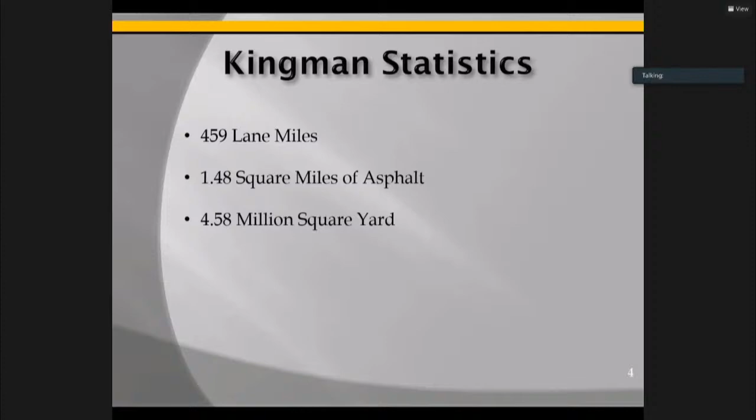So this is just a tool that helps us budget and look at the treatments we're going to do. Now that always comes down to the project level, because the program is going to say, based on these conditions and the severity I'm seeing, here's what the treatment recommendation would be. We as pavement managers are going to go out in the field, boots on ground, and look at it and say yes, we agree, or no, we don't. Maybe we can go from a heavy surface seal to back that out to just a fog seal or some type of seal coat on the top.

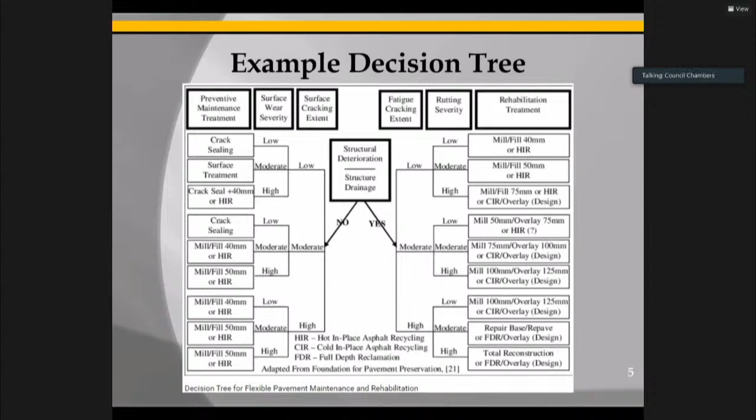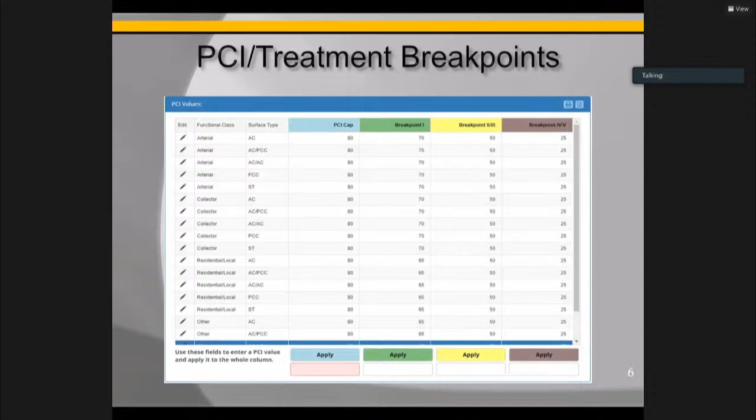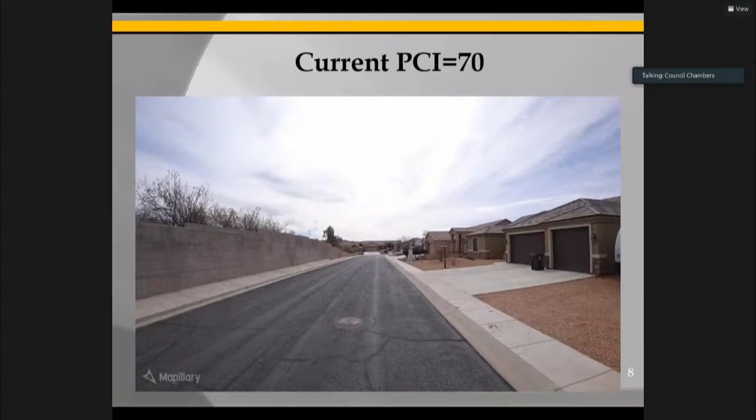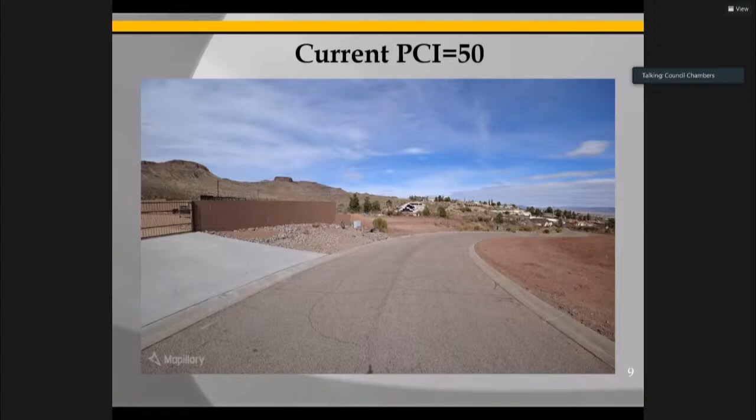Maybe this is a scrub seal, or we do a 2-component treatment. Some of the counties had luck with a SAMI, which is a membrane that helps absorb some of the stress, or a double chip, or something like that. But again, the good thing here is you don't see the base failure. As time goes on, with so many cracks, you're going to start to see water intrusion into that base material, and you'll actually start to see base failures as well. You guys have driven around town and seen them, you got a divot in the road, or maybe the wheel path is rutted, stuff like that.

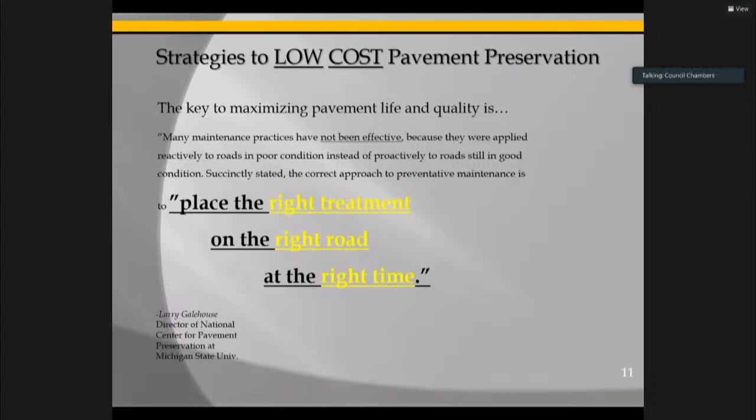Next slide please. In short, both of those tools, the breakpoints and also the decision tree, are used to help us choose the best treatment for the right road at the right time. That's both for cost and for life cycle, which ultimately comes back to cost. But we want to try and minimize, if we can, staying out of a neighborhood from being there every other year, every year, and try to extend that out and be there every couple years. One, we get a better life cycle cost, and two, we're not such an impact to the residents. So right treatment, right road, right time. That's going to be the theme as we're going through this.

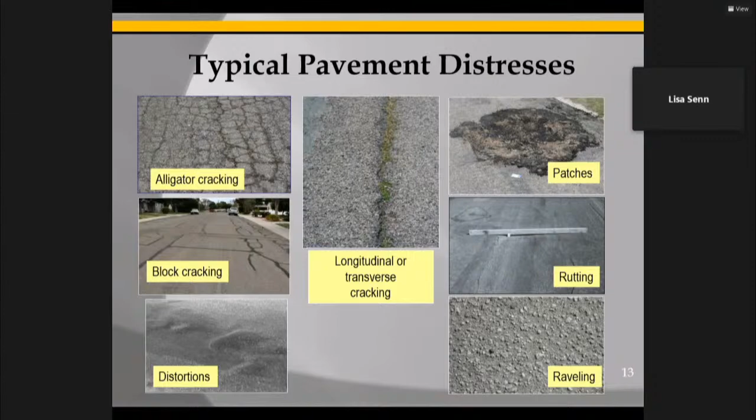Some of the distresses that Jack was talking about, I wanted you to see them up close and personal. So this slide has the alligator cracking on it. It has block cracking, distortions, which if you ride down the road in your car, you feel bumps. You don't want them to be too large or that cup of coffee might end up in your lap. There's longitudinal cracking or transverse cracking. There are patches, and the patches in your city are much better than this one. There's also rutting, caused by excessive loads on that wheel path that break down. There's also raveling, weathering and raveling, and this is an environmental distress. You'll hear a lot of talk about what is an environmental distress and what is a load-related distress. Environmental distresses do degrade the road, but not as quickly and not as harshly as load-related distresses. Next, please.

This shows somebody out walking. We do our QC with walking inspections. You're using the Street Saver software, a very popular program based on the MicroPAVER software of about 30 years ago, but it's moved forward so much. We look at the ASTM protocol as the basis for everything we assess in the street. If you're doing walking inspections like this man is doing, we look at 10% of the sampling area of a street section. So if your street is 1,000 feet long, we're going to look at 100 feet of it, curb to curb.

For the city of Kingman, we used what's called semi-automated distress collection, with a van. You may have seen the little van running around the city with cameras and all kinds of accoutrements, like a Google Earth or Google Maps vehicle. We use these hand in hand. The automated method, because you're driving faster, may not catch some low severity distresses. So we set up control sections to calibrate not just the inspectors, but also the van, to look for the smaller, lighter distresses, so we catch them all and give you a good look at the actual condition of your streets.

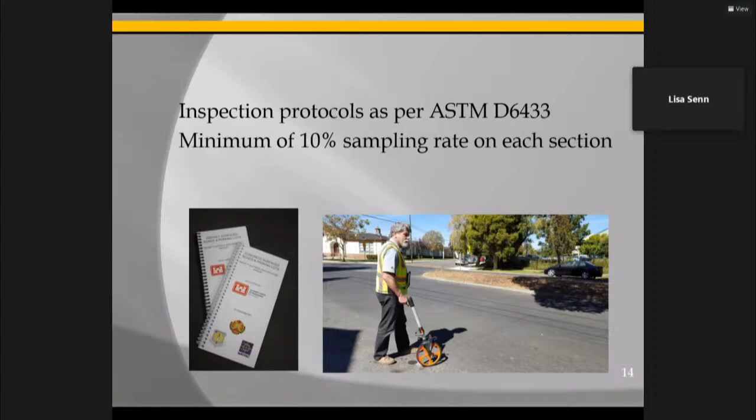Some of the things we did: we gathered the M&R records, the maintenance and rehabilitation work that staff has done, with help from Jack and his staff. We entered them into the Street Saver software. We're going to do analysis to find out what these treatments did to improve the roads.

We're also going to be looking at upcoming projects. We'll plug those in so that when the city has, say, $2 million to spend on their roads, they'll get the road segments that the software is suggesting. And if there are any projects already being designed, we'll include those as well.

As Jack mentioned, it's all based on the decision tree and the unit costs. We just had our decision tree meeting last week where we talked about the unit cost of different treatments you use, what other potential treatments may be used, whether they're effective, and the biggest one - can you even get that treatment in the city of Kingman?

As much as I love Kingman, I've traveled through it many times going from New Mexico to California. There are things you can't get there. So some of the treatments that would be really good may not be available within your area. That's okay, because there's a plethora of treatments out there.

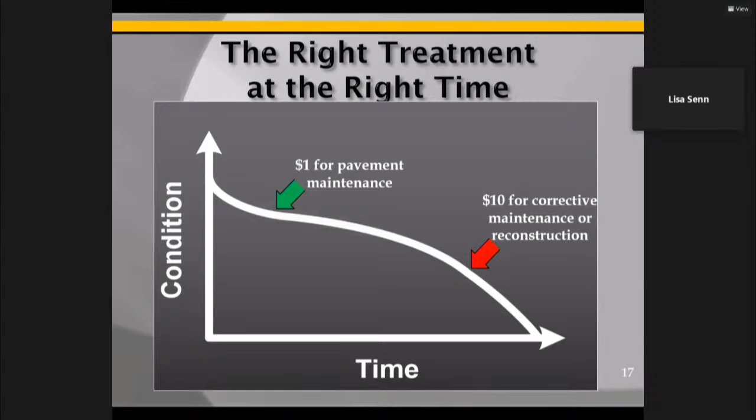So if we do preventive maintenance, it could be as little as $1, or if it gets down the curve, it could be as much as $10 a square foot. So it's always better if we can catch them on the upside of it, because it's going to be cheaper and we'll get more work done. Next, please.

So in the preventive or proactive, we want to preserve the surface of the asphalt. We want it to stay in good condition as long as it can be. So we're going to address the light distresses, which would be a little weathering, some minor cracking, longitudinal and transverse cracking. We're going to put this treatment down that's going to retard some of that cracking and slow it down. And we want to reduce the time that we're going to have to get over to the heavier maintenance, the rehabilitation. We want to stay in the preventive maintenance as long as possible.

There are corrective and reactive strategies, which is to restore the poor pavement to good condition. We restore streets that have had, for instance, in the city, if you have shopping centers where you have loaded goods coming into the city to drop them off for residents to purchase, that truck is loaded and the weight of that truck is going to bear down on the street sections. When they leave, they're a lot lighter, and so they don't have as much impact leaving the city. But those are the things we look at.

Is it a street that is going to have some heavy loading for trucks? Your residentials always have trash trucks out there. Those can degrade the streets. We want to make sure that, as Jack was talking, that we cover up these cracks that start to develop. And so there's a treatment called crack seal that can be put down, which helps to retard the cracks, helps to keep the water and all of the other materials out. And the longer we keep that out, the longer that street is going to last. Next, please.

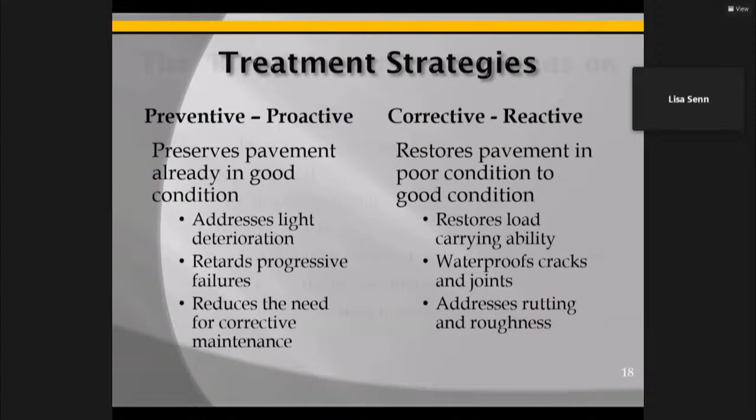So as Jack talked about, the right treatment depends on, is the pavement going to handle that treatment? Is it in the condition that that treatment will improve it? Is the environment a part of it? Do we have a lot of climate? You get a lot of sun during the summer and you get a lot of heat. So that dries out that moisture that's in pavements. We're also talking about traffic. Your arterials get a lot of traffic.

Life cycle costs: initially the maintenance cost is low, but as the street gets older, it starts to cost more. Then the last one, as I mentioned, is the treatments that we're talking about, locally accessible. And can you get it at a good price? Next.

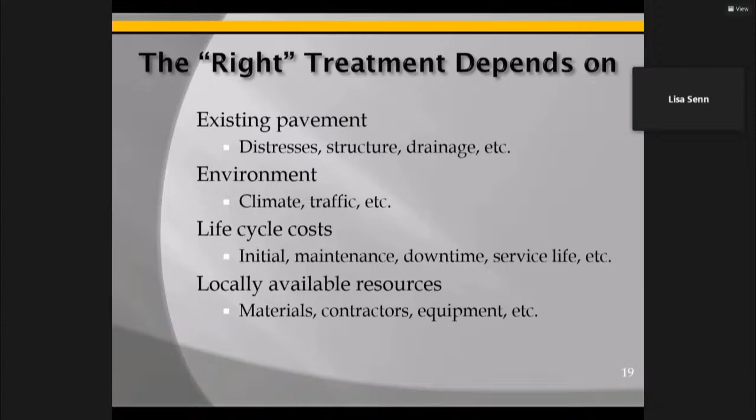So these are some of the treatments that we'll kind of run through, give you an idea. There's crack seal, which I'm sure you've seen. There is a fog seal, which has been used in the city. It's a very light application. There's a slurry seal, scrub seal, all the way up to an ultra-thin bonded wearing course, which we'll talk about. Next, please.

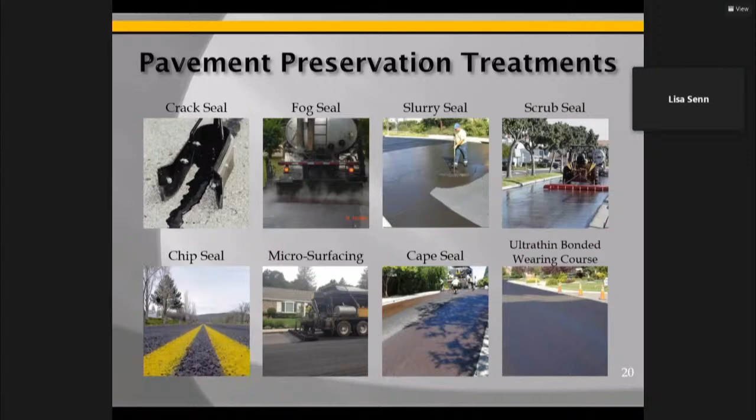So pavement preservation materials, what is it going to be? Well, we're talking about asphalt binder. Is it conventional? Does it have polymers in it that modify it? And have they added crumb rubber to it to give it a little bit more life? There's the granular side of things, which is the aggregate. We're not talking big rocks, we're talking small rocks. We're talking sand that may be there, so very fine, and reclaimed asphalt, or RAP.

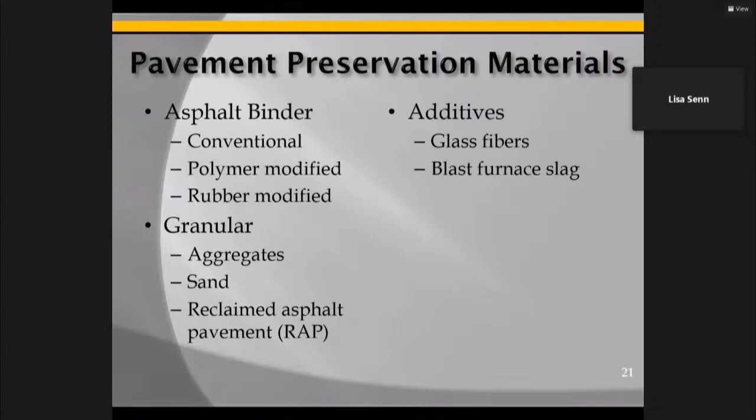There's additives that can be put in this to help extend the life of that treatment, which is glass fibers and blast furnace slag. And I'm sure a number of these things you've never heard of, but don't worry, you can always ask Jack about them, or you can ask me, or Jack will help you to understand what they are. Next, please.

So crack seal, by definition, is flexible. It's rubberized asphalt material that's placed in that crack. And as you see in this picture, this is not the way you do crack seal. And I remember taking this picture in the county of Santa Barbara here in California, and I couldn't believe that somebody actually crack sealed the road so that it looked like this. It's not just a waste of crack seal, it's a waste of time.

That doesn't work. The purpose, though, is to prevent the water and things that you can't compress, like small rocks, anything that kind of blows in that crack. When the asphalt contracts, if those rocks are in between it, it creates a bigger crack. So we want to make sure that when we do the crack seal, we get the materials out and we lay it down in the appropriate manner. Next, please.

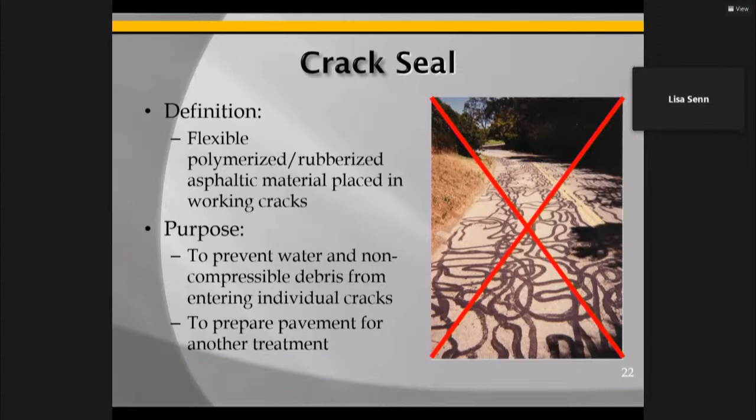Definitely don't want to do it like this. Next. So crack seal, what are the pros? It's inexpensive. It's the most inexpensive treatment that you have. It could be $1 a lineal foot, or it could be as little as 50 cents a lineal foot. So as long as you can put that in there and you can keep the road from cracking, that's a very cheap way to help maintain your streets.

It does reduce materials getting in the crack and making it bigger. What are the downsides? It doesn't really improve the structural capacity of the road. It's not something that's going to help make it stronger. As you noticed in that previous slide, it's not always good looking on the street. It's kind of ugly.

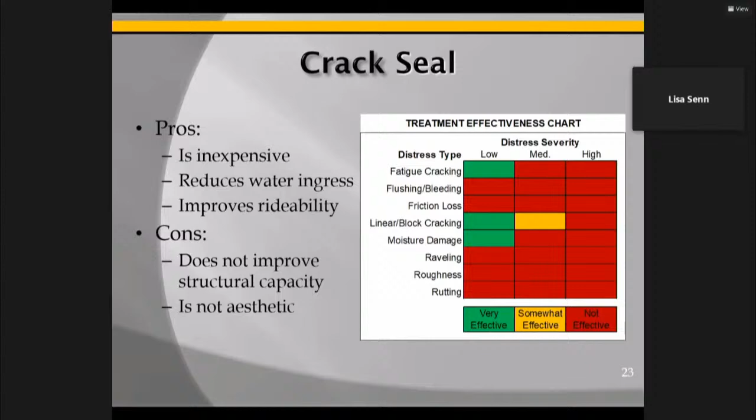In the table to the right, you see the different types of distresses that can be found. You can see how this crack seal can help improve it by the green. It's marginally helpful in the yellow, and red, it doesn't help with that distress at all. So for this one, it does help with the fatigue cracking because it's closing that crack up. And it does help with the linear cracking and keeping the moisture out.

Next. A fog seal is a very light application of a diluted asphalt emulsion. And it doesn't have any kind of rocks or aggregate in it. It's just the application of the diluted asphalt emulsion. And the asphalt emulsion is what holds the rocks together.

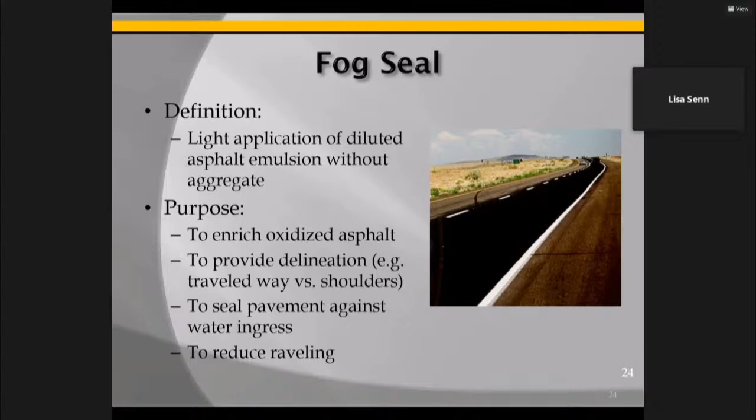The purpose of using this is, number one, it does help to prevent the oxidation of the streets. If your street lines, your center yellow markings and your white markings for your lanes, have faded, this will help to bring out the sharpness of them. It does seal the pavement from wear, not from load, but just from wear. And it will reduce the weathering and raveling on it. Next.

So a fog seal, you see, we've lost the fatigue cracking there. It's mainly good for moisture damage and top-down cracking. It's inexpensive. It only requires one truck that will distribute that treatment over the road, and it does prevent the water from getting down into the cracks. The downside is it doesn't last long. It wears off fairly quickly.

And if it's not put down at the correct rate, it can cause a problem for the traveling public by being pooled up. It becomes slick when it gets chilly outside. And that's not good for the traveling public who may be driving a little too fast and have to stop. They won't be able to stop as quick as they normally would.

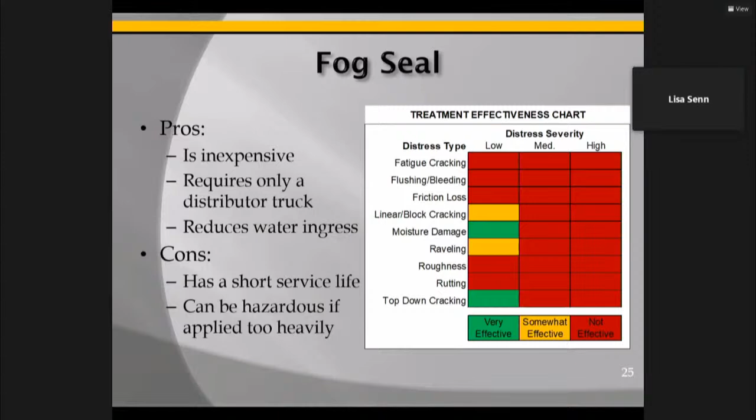Okay, next, please. Slurry seal. I'm sure you've all heard of a slurry seal. It's the mixture of this emulsion with various size aggregate in it. And when it says graded aggregate, your engineering team will say, we're going to do a type 2 slurry or a type 3 slurry. And that all gets kind of wound up in what is actually in there. But basically, it's some rocks inside of that emulsion, and it's applied to the ground.

You can see the truck that applies it on the right, and it does seal the surface cracks. It does help to reduce the raveling, the oxidation, and it will fill some minor surface irregularities. You don't want to get it too thick, but it'll take care of the minor ones. Next.

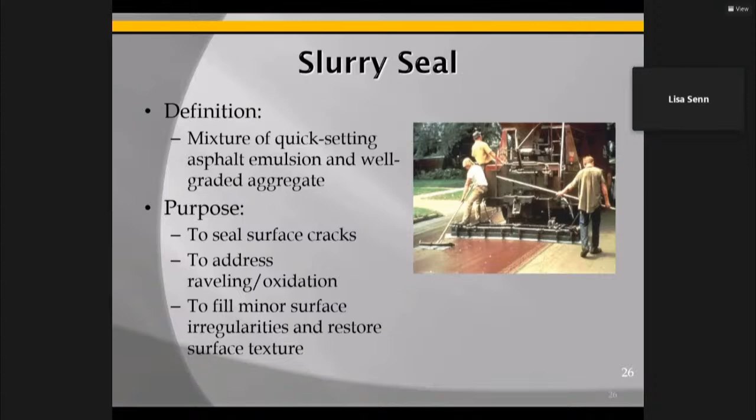So slurry seal helps with the friction loss, linear cracking, moisture. It's smoother than a chip seal by far. It's more surface friendly than a chip seal. If you're in a residential neighborhood and you have a chip seal compared to a slurry, and the kids go out on their bikes or skateboards, if they've got a slurry down and they happen to fall off, they're not going to skin their knees too bad.

If it's a chip seal, they fall off that bike or that skateboard, and they could end up with some rocks in their hands or on their knees. So this is why you want to put something down on top. The cons, the downside, it requires equipment that is less common than is used for a chip seal.

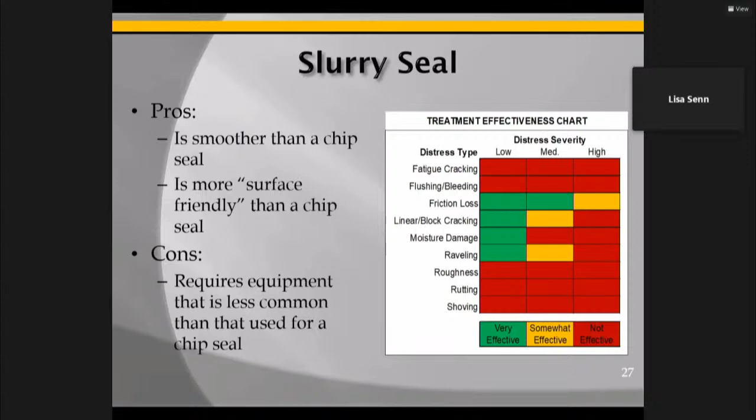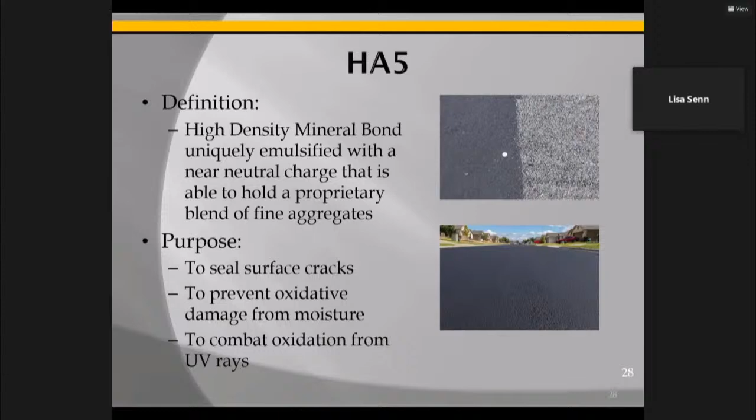Next. The HA5 is a treatment that the city has been using for a while. It has the high density bond in the emulsion that makes it a little more sturdy, keeps it tighter. It is able to hold to the aggregate a little better. The purpose, just like a slurry seal, is to seal the cracks, to prevent the oxidation, and to combat oxidation from UV rays, which in Kingman you have a few. Next, please.

So this is how the sun and water look down on the different treated type roads, the untreated asphalt, the conventional seals, and then you see the HA5. It extends the pavement life. It lowers the cost. There is no loose aggregate that can come apart and be embedded in your children's knees or hands. The cons of it, the downside, is it has a life expectancy shorter than the other ones.

Typically, it's used on a local street because that's where you need it the most. Your local streets don't get much more than a trash truck, maybe a recycling truck, maybe a school bus on it. So it's perfect to put on a residential street. Next.

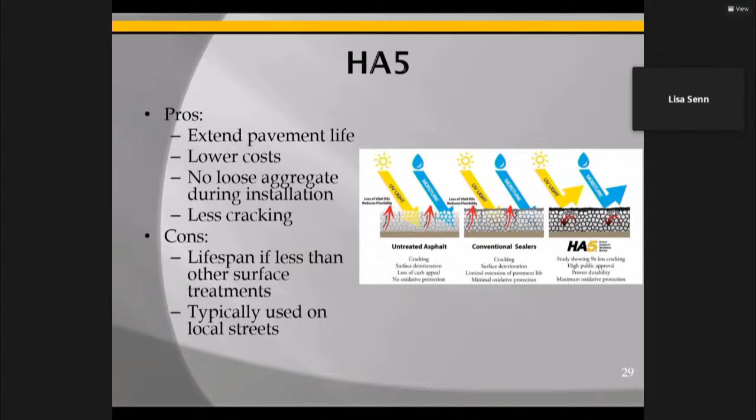So rubberized emulsion aggregate slurry seal. So this is termed as a REAS seal. And basically it's crumb rubber from your tires. They're blended into this asphalt emulsion at a good temperature where it's not too hot, not too cold, but it is just hot enough to make the crumb rubber adhere.

The upside is it can be applied cold, has a longer lasting color to it. So it doesn't fade out and go gray, it stays black longer. It has a high skid resistance and its life cycle is a bit longer. The downside, it's more expensive than a conventional slurry seal.

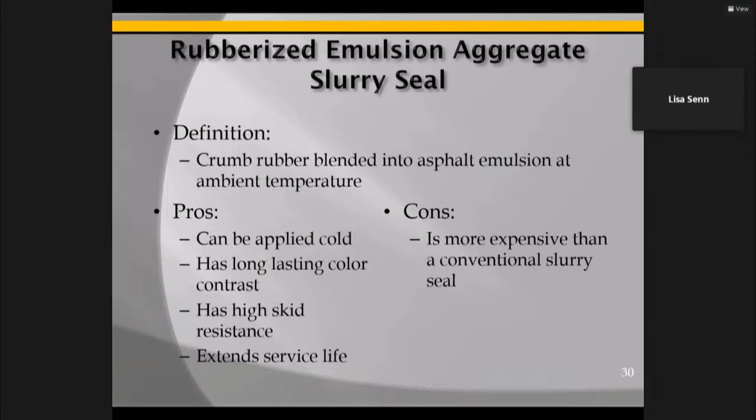There are a number of agencies I've talked to that have used REAS. Most of them find it a good substitute for slurry seals, and at some point they may get a little bit of a lower cost when they use it. Mostly it's a little bit more than slurry, but sometimes they'll get a little bit lower cost on it. So it is a good treatment to use. Next.

Microsurfacing: it's a mixture of the polymer and the aggregates, and as it's mixed together, it forms this nice surface to it. It almost looks like a slurry or something like that, but it's just a little bit better. It wears better because it's got those polymers in it. It's keeping it black. It's keeping it in good condition.

This helps prevent the raveling, the oxidation that we've been talking about, fills some of the minor flaws that are in the street, and it keeps that sealant closed and seals the cracks so that you don't have the water getting into the cracks. Next.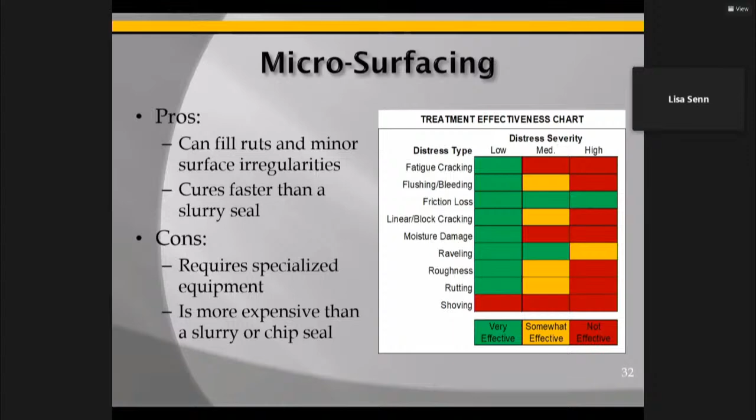You do have to have specialized equipment to put it down. And it is more expensive than slurry or chip seal. But you do get a longer life. There are trade-offs. Next.

Scrub seal. If you can imagine that you've got those cracks in your street, this seal actually goes down and they have a broom, not like we use at the house, but a big, long, wide broom that actually brushes this seal down into the cracks. So it's helping to fill up the cracks with this seal. So you've got that asphalt emulsion, some fine aggregate there, and the broom sweeping all of that into the cracks.

It does help to fill small cracks. It won't fill the large cracks very well, but it has the ability to prevent or prepare the pavement for other treatments. It also helps to get that dark color back that we want. And it's fairly cheap to use. Next.

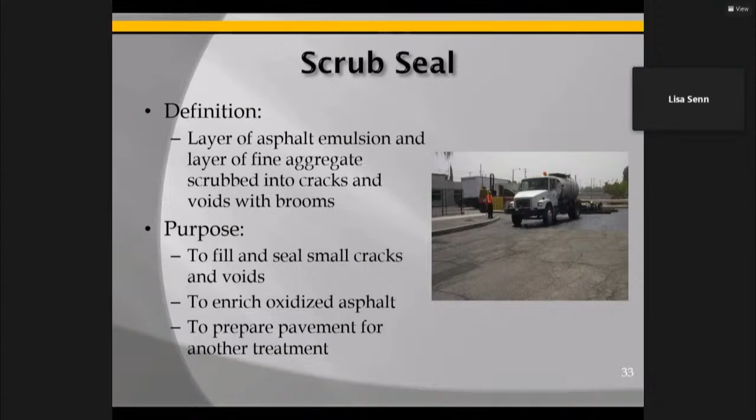So with the scrub seal, we're only seeing a few of the distresses that it works on. Pros, it can fill up to a 1/2 inch wide crack.

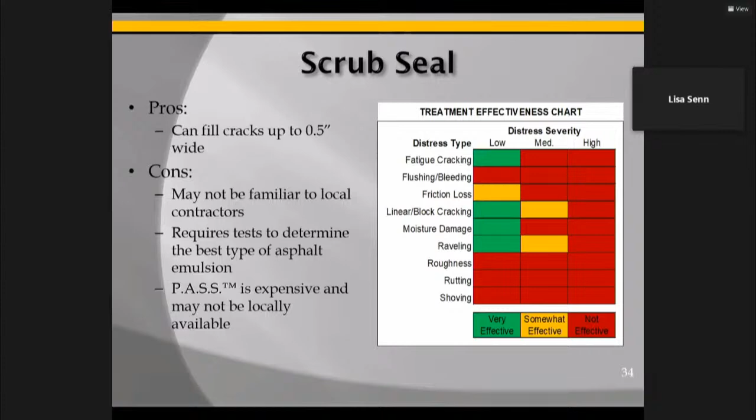Cons may not be familiar to local contractors, which requires tests to determine the best type of asphalt emulsion to use, and the pass emulsion is pretty expensive and sometimes very hard to find.

Next, chip seals. You've probably seen these. They are the application of emulsion with a truck coming behind and putting chips down on top, and then it's rolled. The good side is it protects your street. The bad side is it's really hard when kids fall on it. Also, for the traveling public, until it gets seated, those little rocks have a tendency of jumping up as you're driving. Somebody in front of you could flip up a rock that would crack your windshield. So it works well, but it's a tough thing to have in a residential neighborhood.

The seal is non-load related. It does seal non-load related cracks, but it does improve the surface friction.

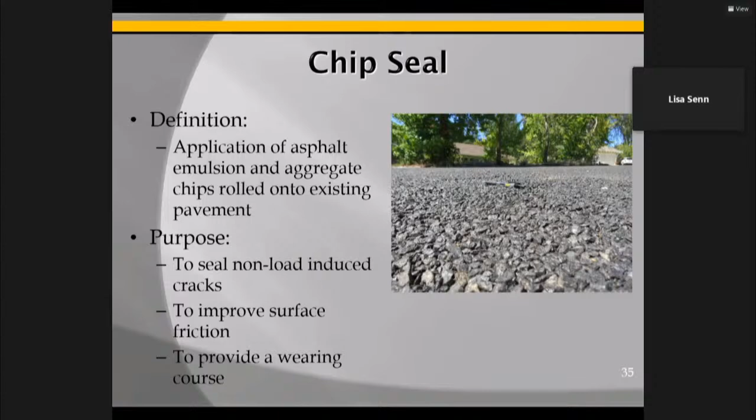On this one, you see it taking care of some of the fatigue cracking and the flushing. It uses common equipment and can be open to low-speed traffic after the aggregate application, once the little rocks have come out. But you really need a very experienced contractor, to make sure they're not putting down too much aggregate for the emulsion that's there, or you could end up with those flying rocks.

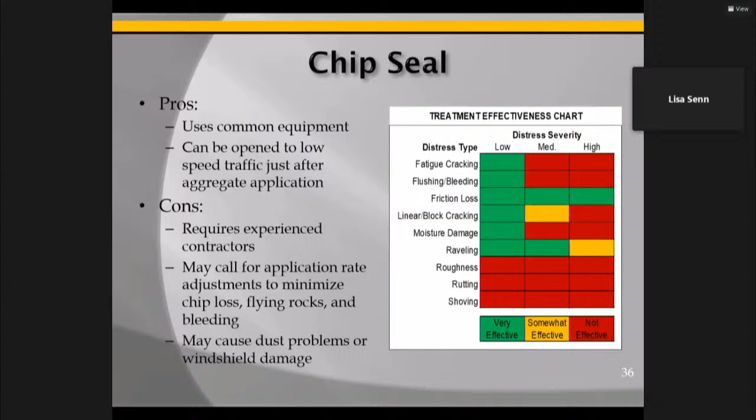A cape seal is the chip seal we just talked about, but on top of it we put a slurry seal down. You see the graphic: we put the chip down, then take the slurry and put it on, which fills all the cracks around the rocks. So it restores the friction to your street, seals the pavement against water or materials getting in, and retards the reflection when you put an overlay around it.

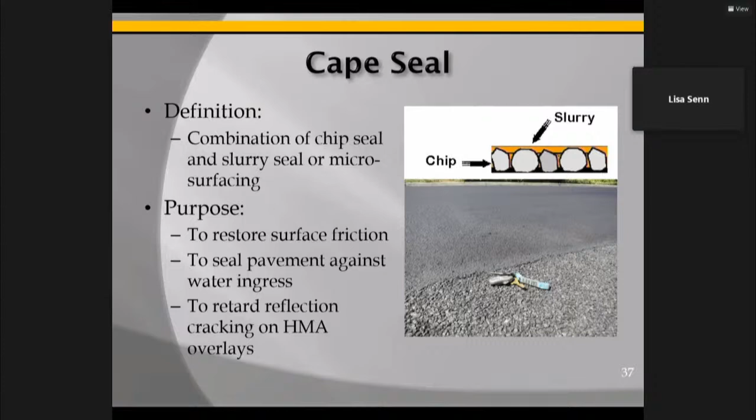Cape seal: except for roughness, rutting, and shoving, it does pretty well. It extends the chip life by binding the chips and protecting the surface. It doesn't have any loose aggregate on it, so you don't have to worry about rocks being kicked up, and it creates a pretty dense surface to walk or drive on.

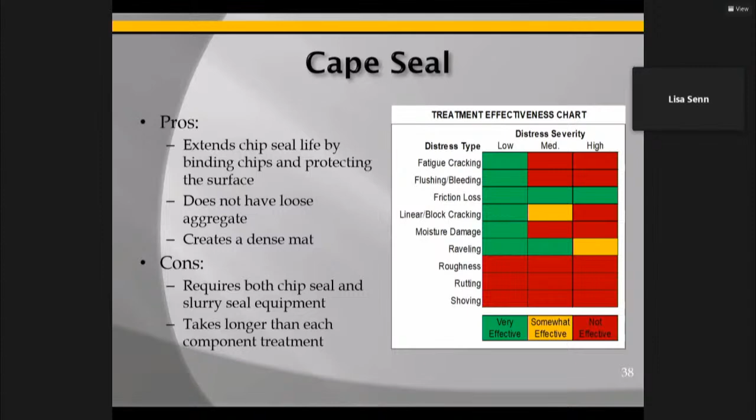The downside is it requires two passes - you get out in your area and put down the chip seal, then let that sit for a couple of days before coming back to put the slurry seal down. So it takes a little longer to get a cape seal down, but it holds up well on local roads, residentials, and some lower traffic collectors.

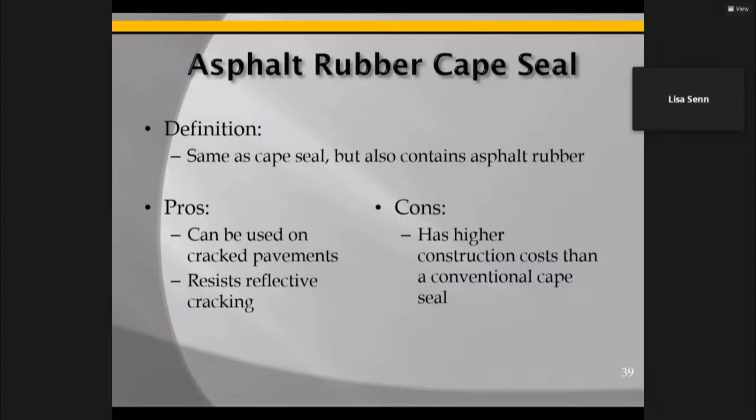An asphalt rubber cape seal is basically the cape seal, but we put some asphalt rubber crumbs in there. Why? To give it that extra flexibility, to help it get into those cracks and stay there. It also helps resist reflective cracking that's coming up from the bottom. It is a higher cost at construction, but the pros almost outweigh the cons.

By definition, a multi-layer surface seal is two or more surface treatments. The reason you want to do something like this is to get the benefit of each treatment you're putting down, to enhance and prolong the life of that street. An example might be a double chip with a slurry on top, or chip seals with microsurfacing. There are a number of different combinations out there.

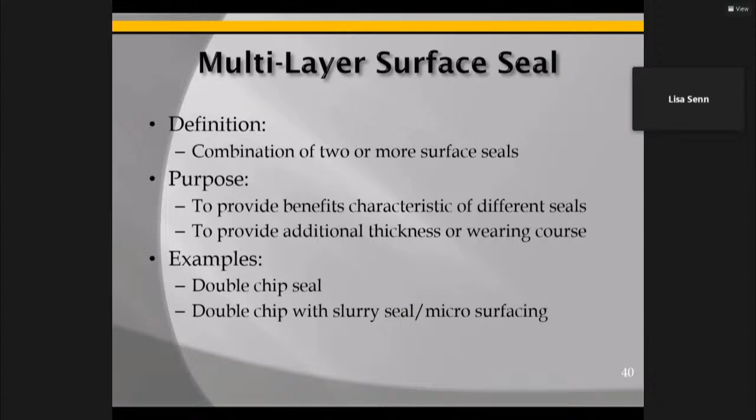This is what it would look like on a multi-surface seal. In the first picture, you see the first layer of chip going down. Then you see the second layer with the binder going down, and finally another layer of materials going down. This actually bonds the street very well and increases its surface life.

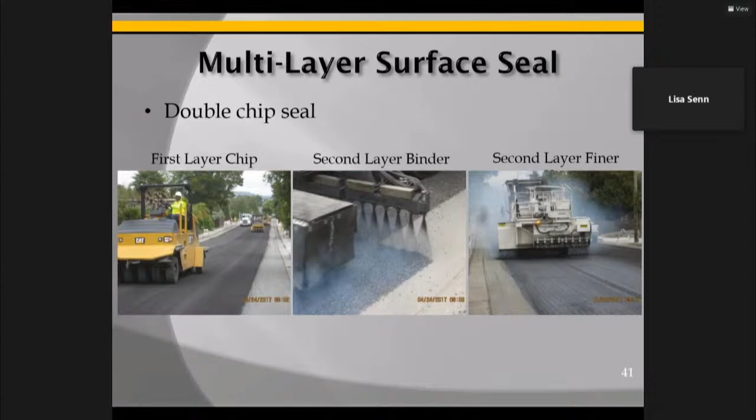A double layer surface seal - when you look at the double chip seal on the left, it looks a little grayer, like it's worn a bit. But when you come back in, put that emulsion down, and add the second, smaller layer of chip, then roll it, they're mashing those little bitty rocks in between the bigger rocks. This provides a really good surface for you.

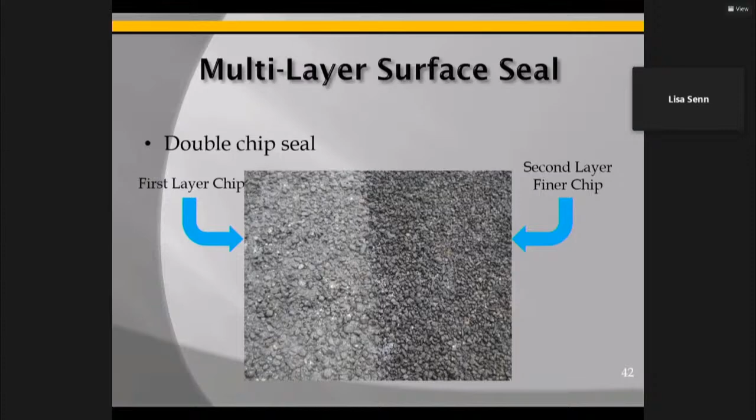So these are just a couple of pictures of some others that are done. This is a double chip with a slurry seal on the left, and a double chip with microsurfacing on the right.

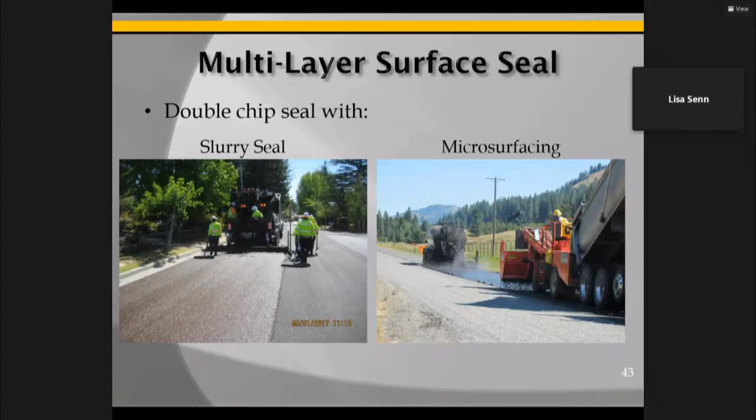Ultrathin bonded wearing course. I first heard about these about 15 years ago. They've been used back east for a number of years, and it is a fantastic treatment in my book, but you've got to have the right contractor and you've got to have the right materials to do it. And sometimes that gets hard.

But it is a combination of the asphalt emulsion overlaid with the HMA, about 3/4 of an inch thick, and paved in a single pass. This helps bond that surface together. I actually saw it done in one of the LA cities where they put it down on their arterials, and those arterials 7 years later didn't have a crack in them. It's very good, but it's hard to find the right person or the right contractor to do this for you.

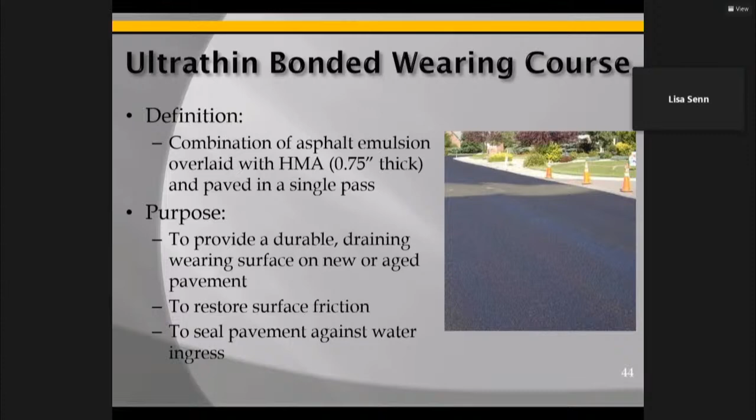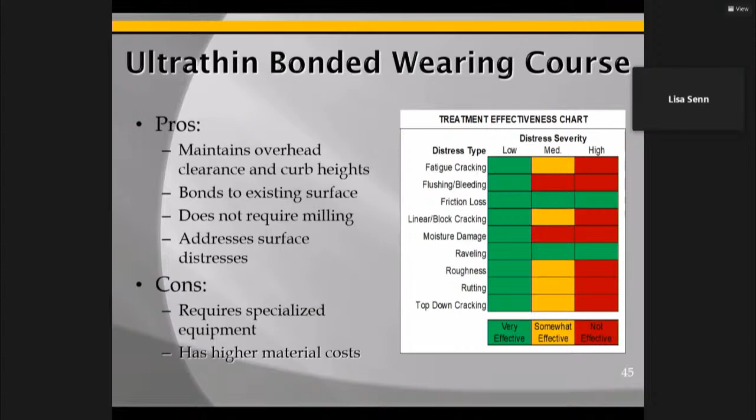So now, if you could put down an ultra-thin bonded wearing course or a TMO, thin maintenance overlay, you would hit every one of the distresses at least low, if not going into the medium and high on a number of them. It maintains overhead clearance and curb heights, and bonds to the existing surface. Gotta love that. It doesn't require milling, so you don't have to have a milling machine out there, and it addresses all the surface distresses. But it does require specialized equipment, and it does have a higher material cost.

Rehabilitation and reconstruction strategies. So we've been talking about preventive maintenance. When the road is in pretty decent shape, 60, 65 PCI plus, we can do these things, and it will improve the life of the streets 4 to 7 years. Rehabilitation and reconstruction, we're going to take out what's there and put something back.

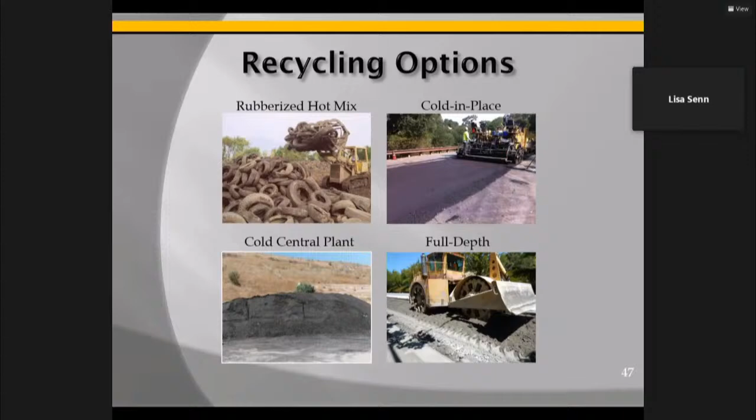So there are recycling options: rubberized hot mix, cold in place recycling, cold central plant, and full depth reclamation.

The RHMA, or rubberized hot mix asphalt, is a combination of recycled tires and blended asphalt and aggregate. So when you put it back down, there are two types of binders. You've got your asphalt rubber with a crumb rubber that's modified, and this is called a wet process. And then there's a terminal blend, which has the crumb rubber and uses a dense gradation of the rock. So it depends on how large and small that rock is.

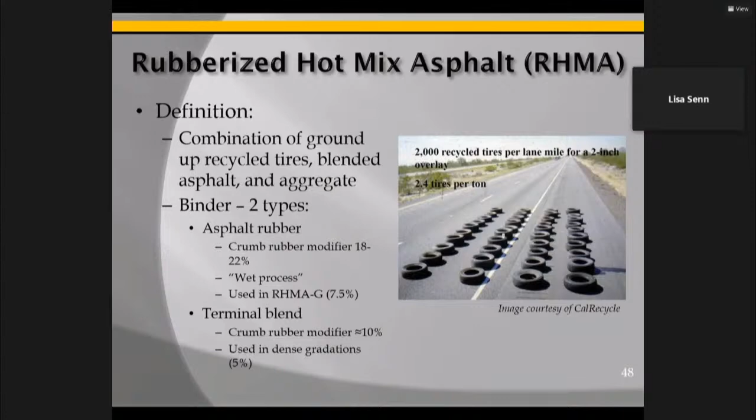It is a good product. Once again, you may have problems finding a contractor to do it, but if you can, it's a wonderful treatment.

So the pros are it resists reflection cracking with thinner layers than conventional hot mix asphalt, and it's environmentally friendly - it doesn't have to be quite as hot when it gets put down on the street. The downside, it's more expensive than conventional, its temperature is sensitive, and it has potential for rutting concerns if the thickness is too small or too thick. The really nice sweet spot is about 2.4 inches.

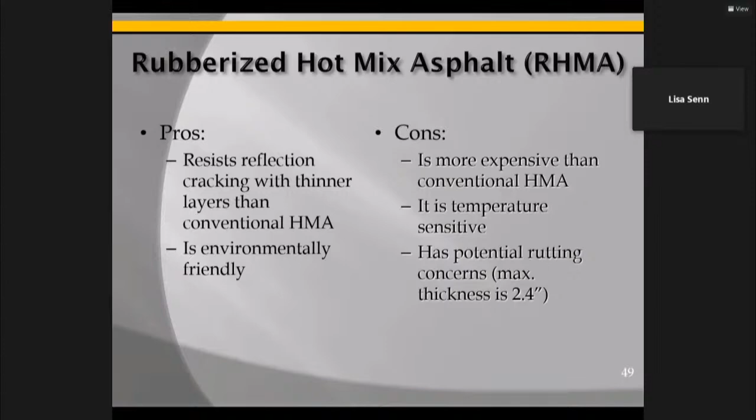These three pictures you're seeing were done at the UC Davis Pavement Technology Research Center. What they did is they put a weight on a wheel that ran across these areas as much as 10,000 times to show the differences between the cracking. So on the left, we see 3 inches of conventional hot mix asphalt. In the middle, 1.5 inches of hot mix or rubberized hot mix asphalt. And on the right, 1 inch of the RHMA. Each one of these can help with the reflective cracking that comes through.

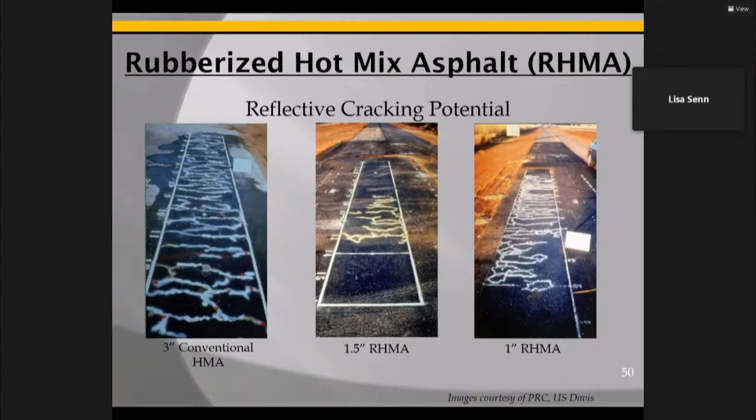And I'm sure you've seen it on some of your streets in the city. It depends on the type of material that your staff has decided, with the treatment, to put down - how many times can I go over that without the cracking coming up.

So here are the different looks. If you get up close and personal with the asphalt, this is the difference. There's a dense graded on the left, and it looks like somebody didn't quite compact it correctly, with little divots in there. Below it shows you how the rock and the emulsion tie together. The graphic in the middle is called a gap graded mixture, and it looks even rougher than the one on the left. Finally, there's an open grade mix on the right, and that one is very pitted. So dense graded and gap graded, if you can get them, that's what you would want to do. Open grade, you may have some difficulties, but staff knows where to put those types of treatments. There are places in the city they may work well.

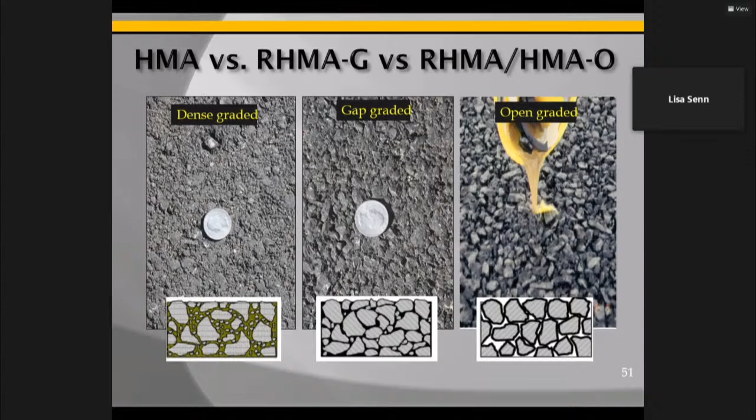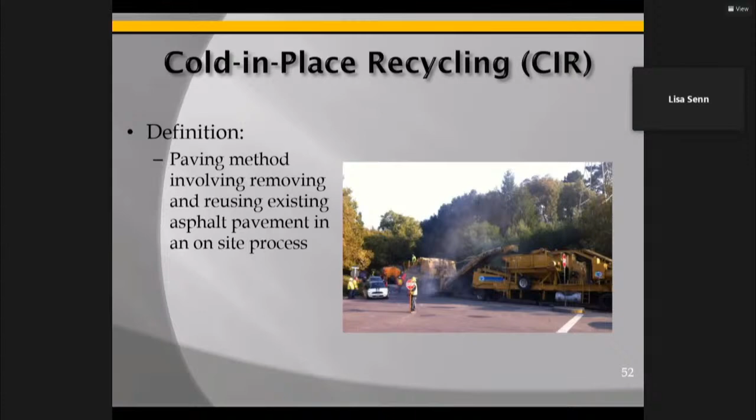Cold in place recycling is a treatment that uses what's called a train of construction vehicles. There'll be one in the front that scoops up the asphalt out of the road, throws it back into a hopper where it gets jumbled up and crushed, then gets another treatment put on it, and comes out the back recycled. We rejuvenate it, put it back down where it was, and then compact it or roll it. Very often staff will go back and put a thin overlay on top just to finish it up or cap it.

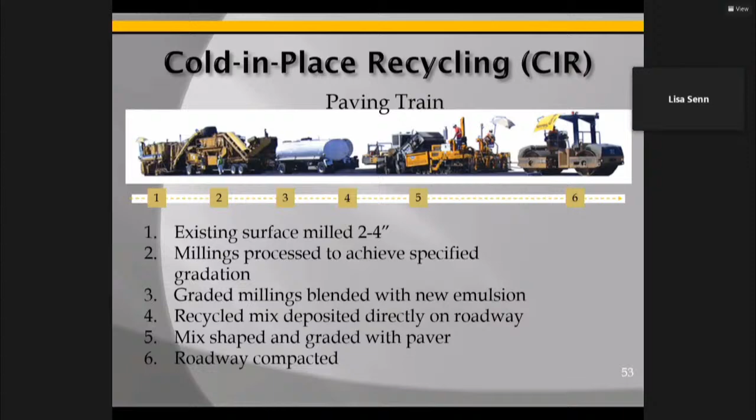So here you see how it all works. You've got that number one vehicle that picks it up and puts it into vehicle 2, and then it moves to vehicle 3. If you've got a lot of windy roads, this is probably not the treatment you want to do. But if you have some long roads, this is a way to stretch your paving dollars. I have seen it come in anywhere between 20 to 25% cheaper than doing a reconstruct on your street. It's a way that you're not having to haul that rock out, that heavy truck going across your roads and deteriorating them, but still get a new surface in there. So there are some trade-offs there.

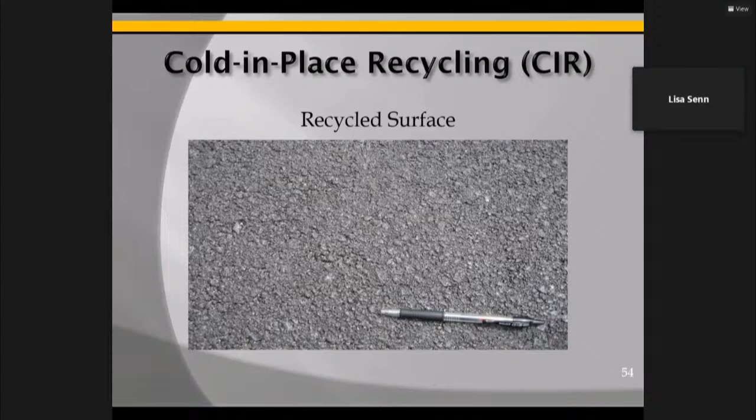So this is what the surface would look like after it's been run through the mill, spit out the back, and compacted. It doesn't look bad, it looks pretty good. But like I said, some agencies will come back and put a thin overlay on top of it just to cap it off.

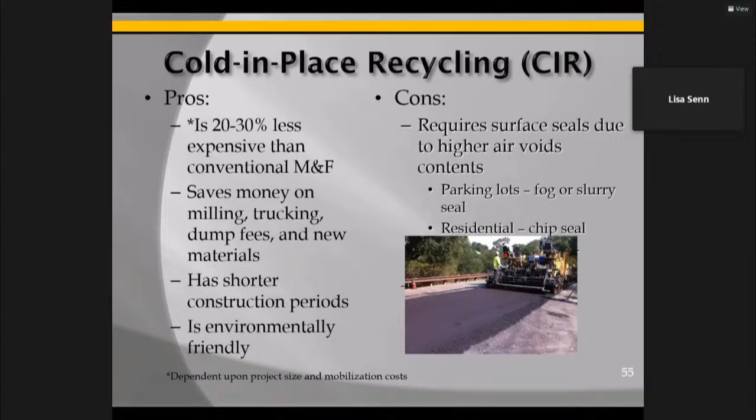As this shows, the pros are it's 20 to 30% less expensive than a conventional mill and fill, saving money on milling, trucking, dumping, and new material. It has shorter construction periods, and that's okay. It is environmentally friendly. The downside: it requires a surface seal since it has higher air voids in it. Parking lots aren't always the best for it, and residential chip seals aren't always the best there either. You've got turns and not long stretches you can use this on.

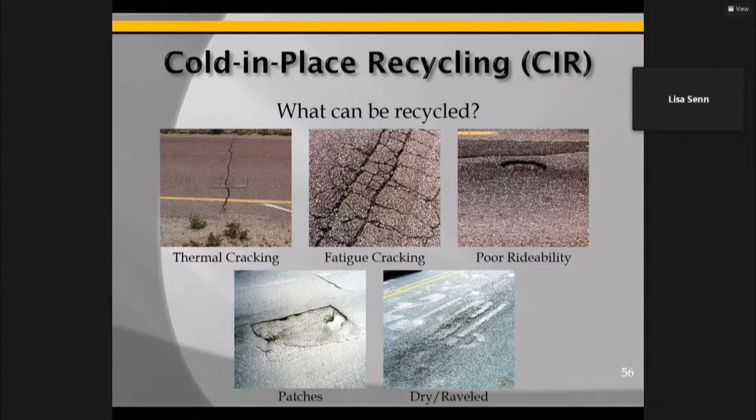So, cold in place recycling, what you can recycle: notice we've got some cracks going across the street, alligator cracking in that middle picture, some distortions or ridability issues, patches, and dry and raveled surfaces. All of these kinds of things can be put in that mill, added with some polymer modified emulsions, and spit back out for a new road.

What we can't use when we do cold in place: you can't have paving fabric in there. You want to make sure that the base you're going to be grinding up is in decent condition. You also want to make sure that the drainage on the street is in good shape, since it doesn't like poor drainage.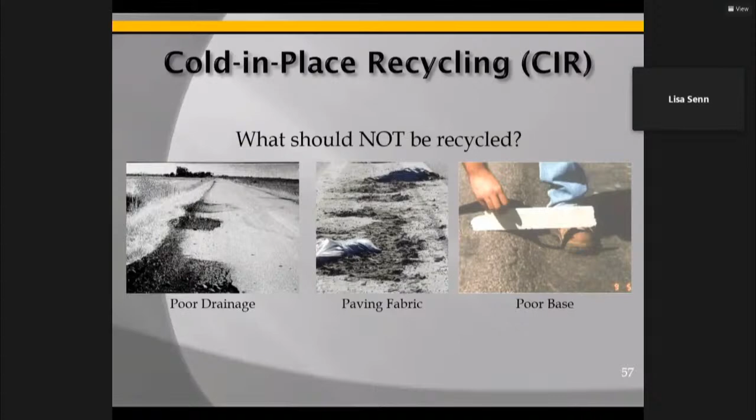So cold central plant recycling is basically the same kind of idea that we just talked about, except we're going to be moving the material that we pick up off to a plant off-site, and run it through. We're going to be milling that existing asphalt, recycling it with other polymers, or RAP, recycled asphalt pavement, and then we haul it back to the location where it came out of, put it down, and compact it.

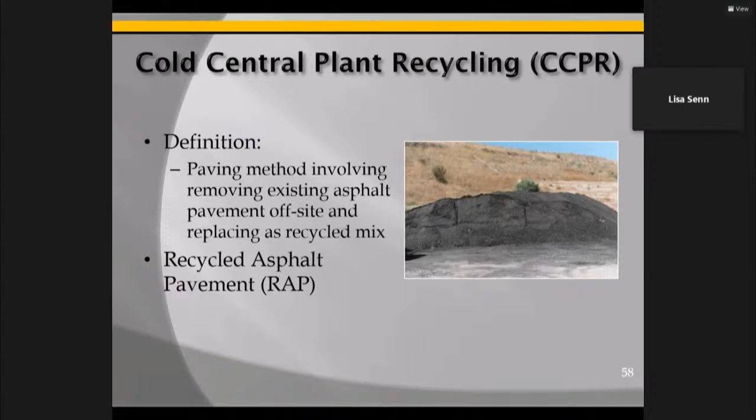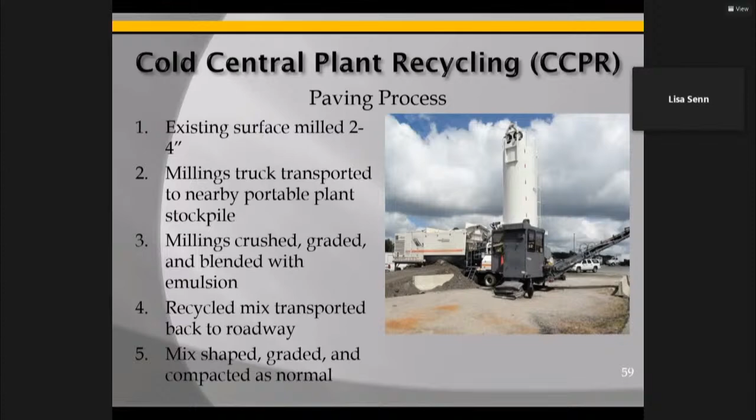So existing surface can be milled 2 to 4 inches. A milling truck transports it to a nearby portable plant. It crushes everything up, puts the emulsion back in, and then that recycled mix heads back to be put down on the street again.

So the pros: it is less expensive, it saves money on milling and dump fees, and provides a chance for subgrade and base stabilization. It is environmentally friendly. The cons are we've got to haul it off, and there can be air voids in there that we don't want to have.

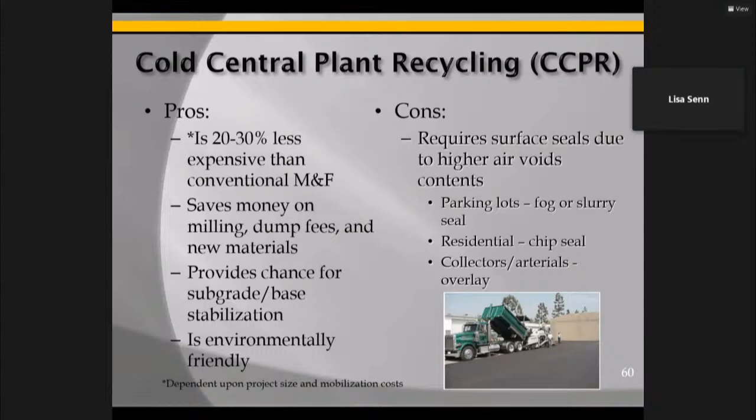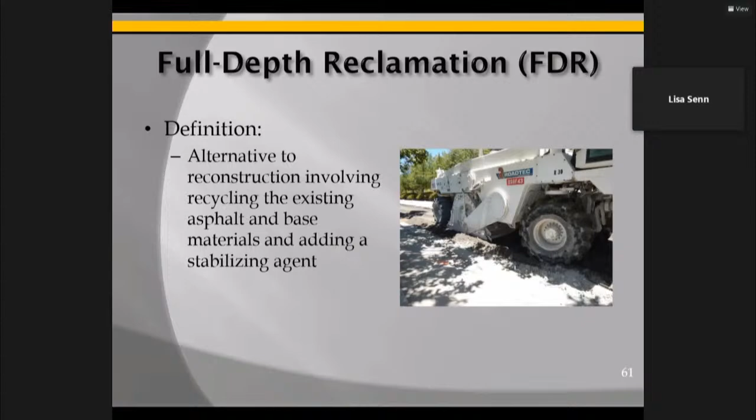Full depth reclamation. This is one I really like. It is a way that we don't have to reconstruct a street. If there is enough asphalt there, the contractors can go in and just pick it all up in this machine, like you're seeing in the picture, and they're going to be recycling it in there, adding polymers, putting in a stabilizing type additive, and then they're going to place it back down.

So this is what it looks like, the whole process. From the existing road, they're pulverizing, compacting, and then putting it back down. Notice in the last slide, they come back and put an asphalt overlay on top of it. So they've strengthened the sub base, and they've made it a road that is nice and clean, back to new. It is also a really good treatment.

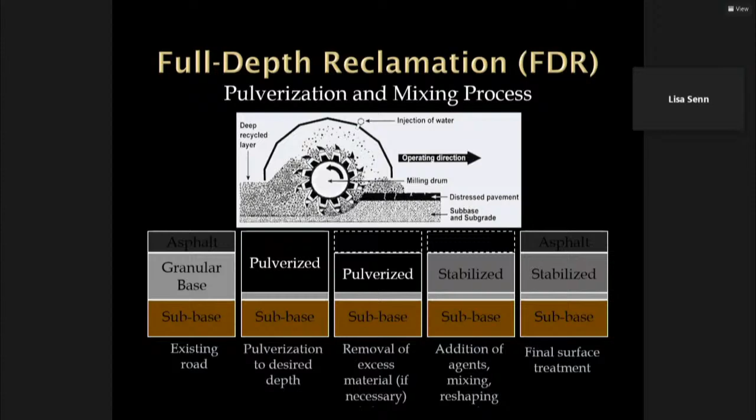There are a few downsides to it, but not very many. You can use something to stabilize it—Portland cement concrete or Portland cement. You can use lime, and mostly I've seen lime being used. There's also asphalt emulsion, and they've actually got a foamed asphalt out there that they can put in to make it bind together well.

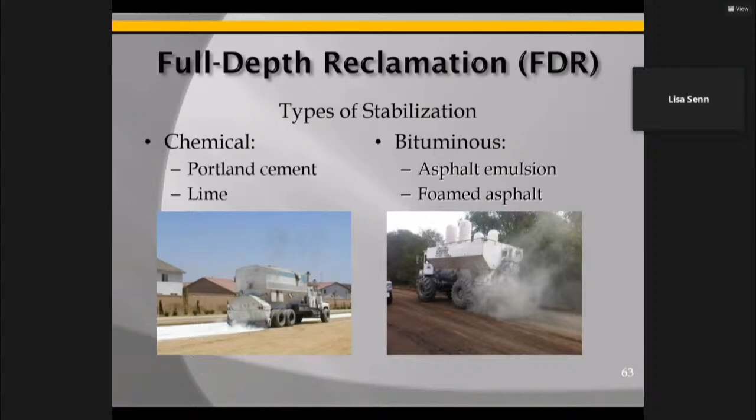Full depth reclamation is better than the other seals as far as the lower cost goes. You can see up to 50% less expensive, once again depending on whether you can get that contractor in. It provides strengthening when you put that stabilizer in there, so your base is stronger. It has shorter construction periods because everything's being moved very quickly, and it doesn't expose the subgrade, which is what we don't want to happen.

Now, the downside: it does require an experienced contractor. You have to know what material you can use for stabilization—is it going to be lime, or is it going to be concrete? You have to know that, so you may have to have soils tests or other tests done to figure that out.

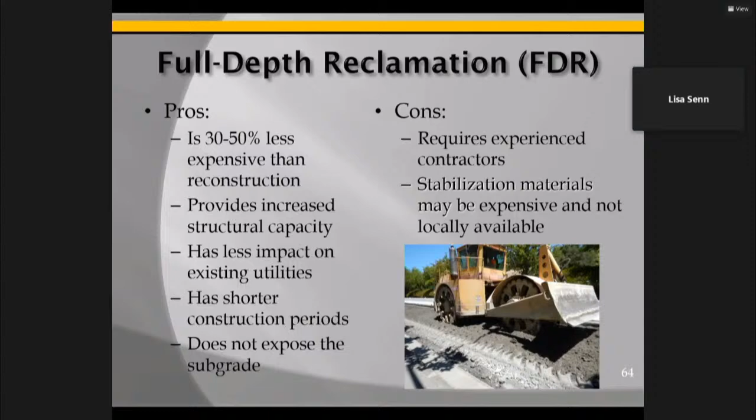So I've given you some of the treatments that have been talked about. As we start putting together the decision tree with staff and the unit costs that go with it, that will become the basis for our analysis—using wherever the PCIs are breaking, what that material cost is for that treatment, and their budget. That will be coming up probably over the next several weeks as we work with staff to do the analysis and prepare the report for you.

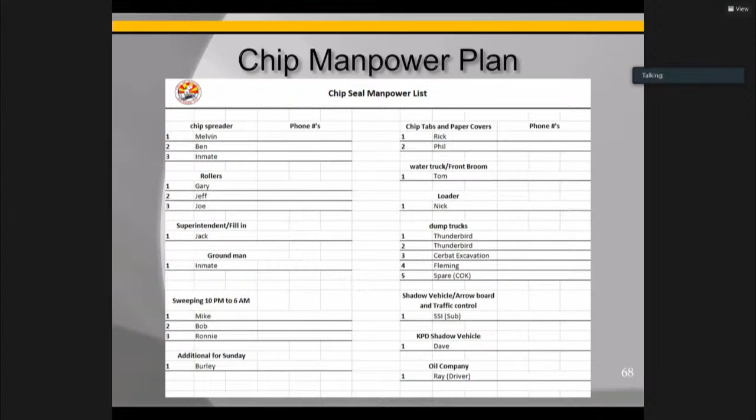Next slide, please, Annie. So we can come back for questions on that, but I just wanted to cover the last slide I have here.

One of the items that has come up a couple different times is MAG 336. We have adopted the Maricopa Association of Governments standards and specifications. We do have some addenda added to those in the form of City of Kingman standards and specifications, for items we do a little differently, say water, sewer, whatever, so we've added those into the City of Kingman addenda.

This one is specific. I put a lot of text there, I apologize, I'm not going to read it to you. But what it means is, if I'm a utility or a developer or contractor and I go out and need to cut more than 300 feet of asphalt, at that point it triggers that I'm going to go back and do half the street essentially, or the lane, you can read in there, you're going to do a slurry seal over that portion.

There is an opportunity. It is already adopted. We have not really utilized it in the past. Mohave County does to some extent, and actually that could be a question we could ask them as well.

I've reached out to other cities in the valley, and I did find some of them are using variations of this. They've adopted their own, and a lot of those are related to a moratorium on asphalt cuts when you have a new road. You don't necessarily want it being chopped up, so they require that if it's cut, you have to come back and do the length of the patch, the width of the road. There's a lot of different variations.

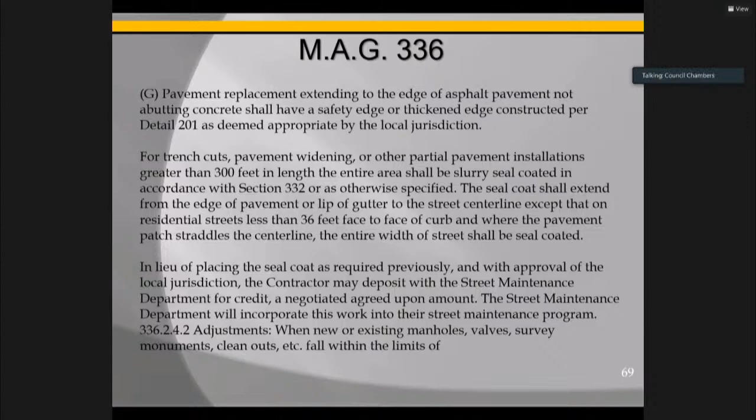And with that, that is all my slides, and I'd be happy to answer any questions that you may have.

I didn't bore you to death, did I? No. I guess this is a lot of information, of course, to absorb, and I feel like I could be part of the road maintenance team now.

But I guess my question is, because we had a long list of types of seals, and then Sam kind of narrowed it down to just a few that he liked, and so did Steve, the rubberized chip seal and then just various, the master seal over a chip seal and HA5.

As you're doing this analysis, I've seen our road map with all the red lines on it that show the poor condition of a lot of our roads. Are there areas that seem to just kind of say, it's not an 80-20 rule, but that a majority of our streets are going to have a certain type of need, or is it really spread all over the spectrum of these types of applications?

So it'll be done by condition category. So in a real basic sense, if it's red and it's a residential, it'll fall into this particular treatment. Maybe that is a chip seal with a surface seal on it, or maybe we're looking at a cape seal, or whatever that ends up being. If it's red in an arterial, it'll fall into that group. If it's red in a collector, it'll fall into that column.

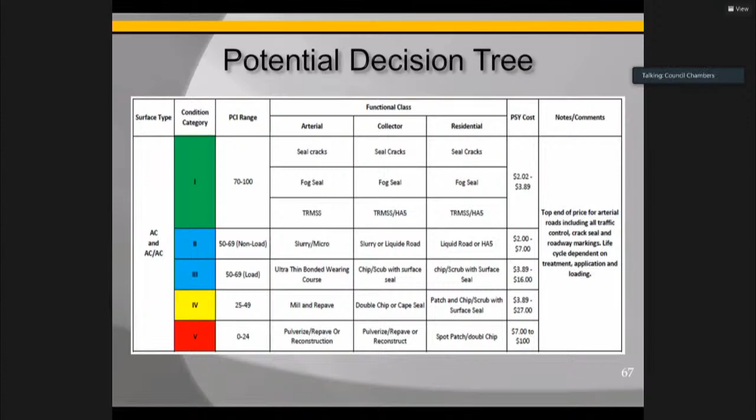We're looking to get the best life cycle and the best value for the dollar that we spend on it. It sounds like there's quite a few more options on the preventive strategies for the type of treatment that you use. There are lots and lots of treatments out there. It changes weekly, monthly. It really does. The industry is moving. There are some staples that have been out there for a long time: chip seals, overlays, those sorts of things.

Many of those treatments that you've seen in Lisa's portion of the presentation, high-density mineral bond, that's right out here. We did that in a number of areas. Downtown, we did it in some residential areas. We've seen good performance out of that. The ultra thin bonded wearing course, that's actually Stockton Hill. We did that project. It was a thin overlay from Andy Devine up to Detroit Avenue.

Again, we've seen really good performance out of it. We see some cracking, but the road was a little more cracked out than we typically like to see, but we're kind of behind the 8 ball, so it was either that or we add another $6 to $7 per square yard to move that to a thicker mill and fill. So we're always looking at those treatments. I can manage the cracks when they're not huge and they're able to be sealed and not cause some type of structural deficit to the roadway.